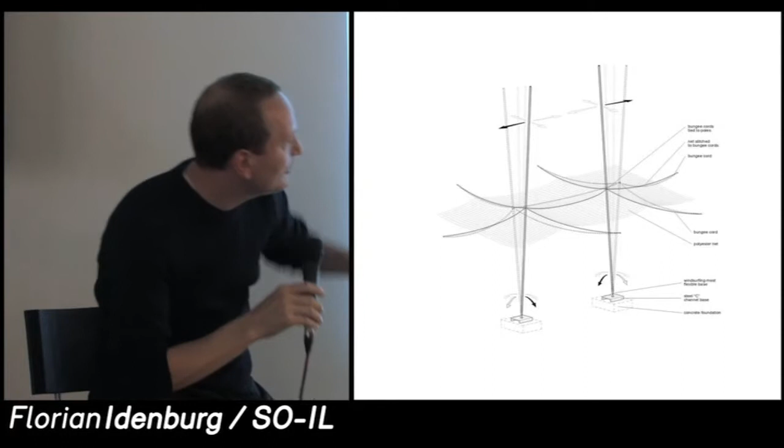I'll speak about that aspect later. So this is basically the basic building block for this system.

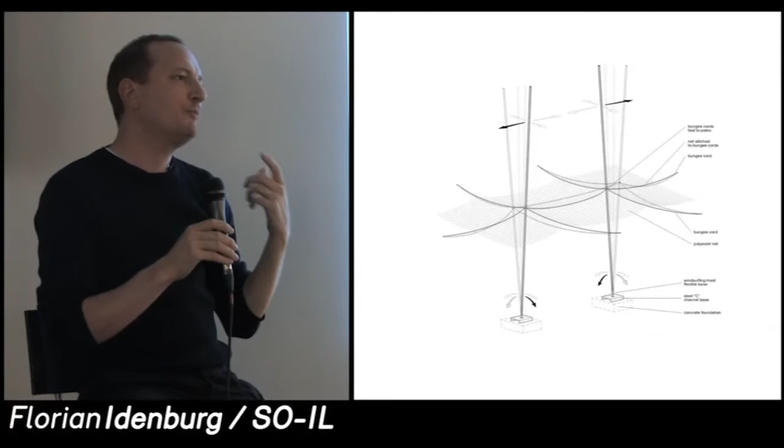With this, we filled the entire courtyard on a Cartesian grid, and we inserted a number of activators - places that are the interface between us, the user, and the system. Hammocks, a pool for cooling. There were pulleys and ropes, basically a place where people could interact with this system.

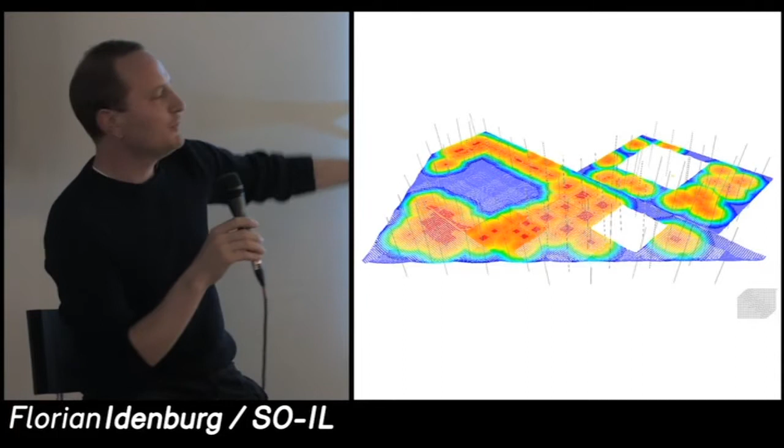This was what we presented, and we also presented this scheme to the MoMA jury, because obviously something that is always on the verge of collapse will raise, especially in the US, a lot of questions about liability. So we made this image from a Rhino model, which had nothing to do with any structural engineering, and we put the Buro Happold logo on it.

And then we won. We ended up winning because they thought about it. So the next day we actually had to call Buro Happold and said, congratulations, we won. And they asked, what did we win? We said, well, PS1, we have to build it. We explained the system, and they said there's absolutely no way you can calculate this, no way we can predict the outcome - which was the essence of the idea, but it also created a lot of challenges.

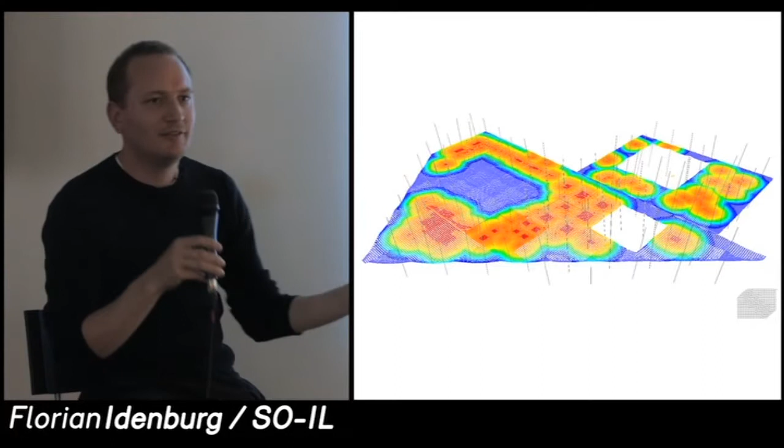So the first thing they said was to immediately build a mock-up and see if it works. We ordered standard surf masts and standard bases, and it all looked pretty promising and nice, so we said, well, this works. Then 2 days later we got a phone call from MoMA, and they said, 'That's great. Can you clean out the mess in the backyard?'

Obviously, failure would also be part of the project itself, but this was a little bit too much of a collapse early on. Luckily, we were able to continue to fine-tune the system and create this environment. I think for us it was really important that it was never seen as an object.

It was always an interior. We basically covered the entire courtyard. It was very much an interior experience.

The other aspect that I didn't speak about in the beginning, which was really important to us and something we're very interested in, is the role of the virtual within the way we currently navigate space. It seems that one of the issues with sustainability is that we care less about our physical realm because we're spending so much time in our virtual realm, and we thought, can we learn from what is so attractive about the virtual?

A number of issues that informed the scheme are its playfulness, the fact that you as a user can activate its environment, the social aspects, and we tried to see if we can get those things back into the physical.

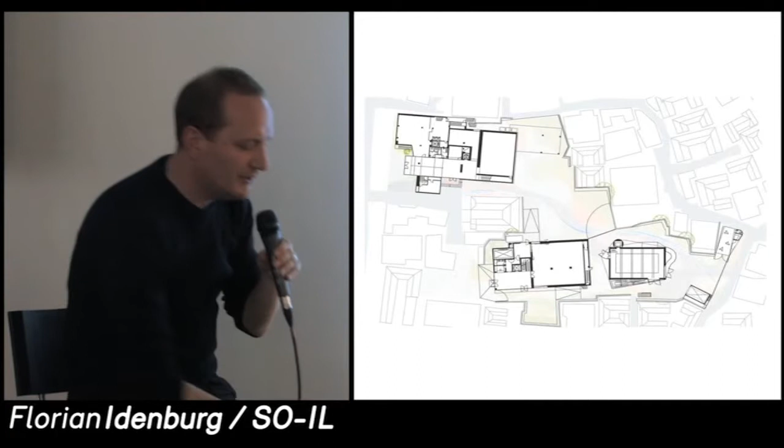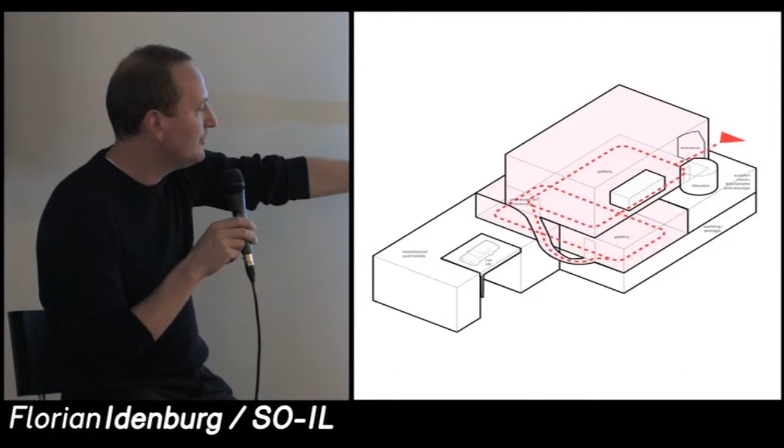A very straightforward diagram, almost a Dutch diagram, I'd say. Hard box, single box, maximum amount of allowable space within this site. Circulation pushed out, so entrance, elevator down, and stairs to the roof. Underground, much more space, another gallery space now turning into a lecture hall, plus parking and storage. The ground floor is a typical hard, white, modernist box with skylight from above.

But we felt we needed to do something with this outer edge. We needed to find a way for this hard box to blend in much better within its more fluid and historical, fine-grained environment. So we took cues from the traditional Korean aesthetic.

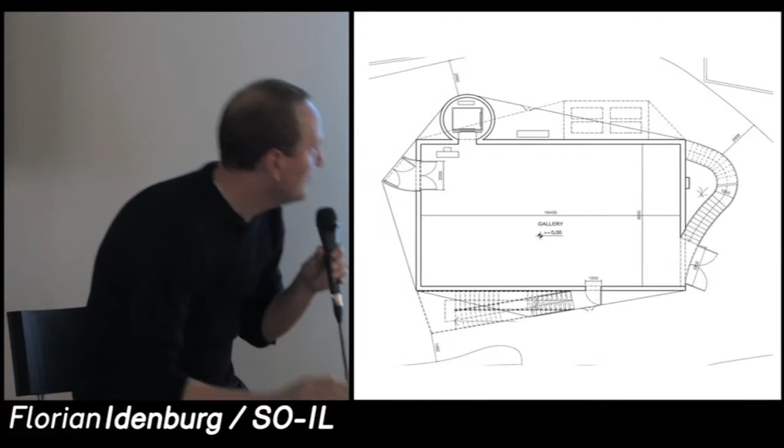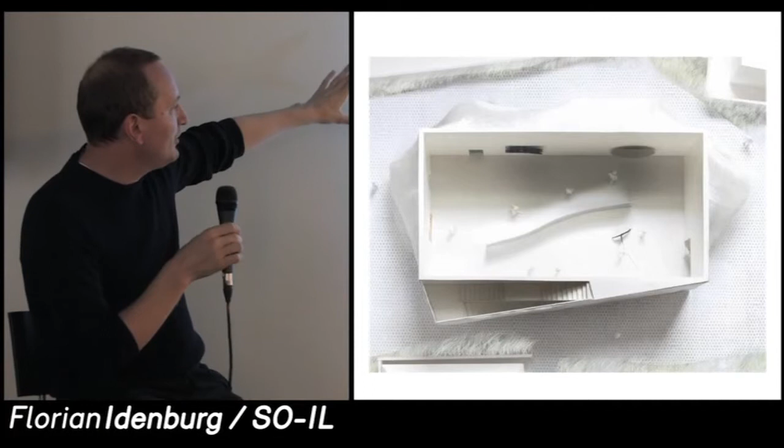So we made this model and wrapped it in a reflective stocking, basically an elastic stocking, to soften the edge. This clear box would become much more undefined, less explicit, and more fuzzy. We then had to get a permit, and the local government was very sensitive to this issue. The diagram at the bottom shows how contextual we are with our move.

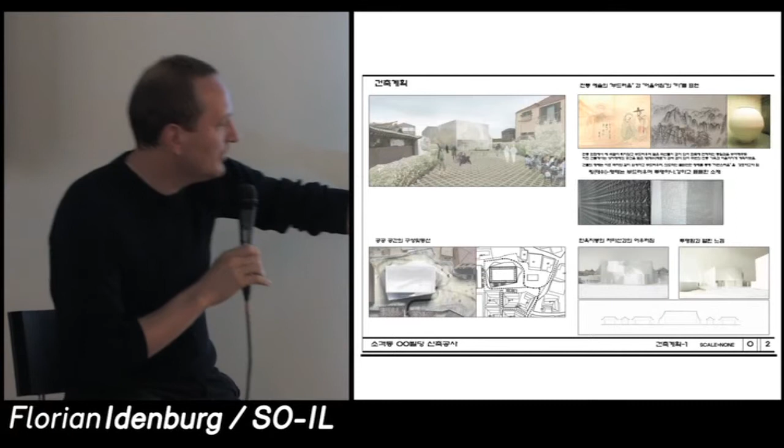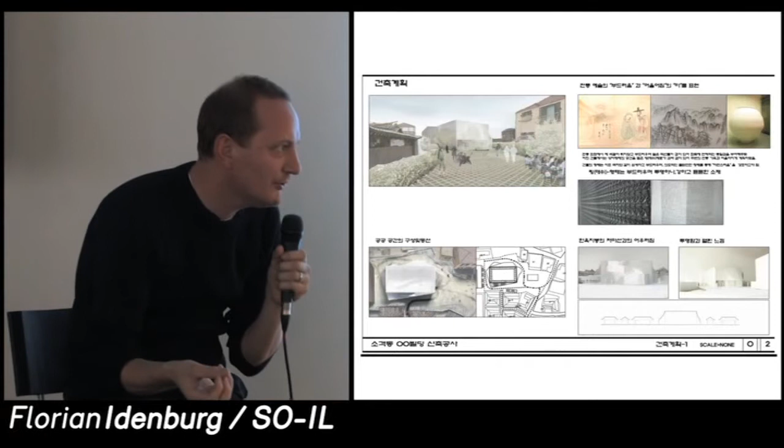The project design got approved, and they said, now go ahead, make it. But how do you do that? How do you wrap a box in a permanent fog? It needed to be strong because it was exterior, and it needed to be metal in some way—but what material could take on this form?

So we started to look at chainmail mesh, which is actually the only metal material that can take on double curvature in a very beautiful way. It can take the shape of the body beautifully because of the way these rings are connected to one another. It works on the scale of the body, a simple geometric working, but unlike any weaves or meshes that need pleating or seaming, this one really drapes beautifully in three dimensions. This is the largest scale commercially available, basically 1.3 centimeter diameter.

But we needed to look at something larger for the scale, because this is for the scale of the body—it's used for butcher gloves and belly dancing gear. For the scale of architecture, we needed to look at something larger.

So what we did is we just laser cut and made this in our office to test the scale of what would be appropriate. And we started to explore the workings of this mesh.

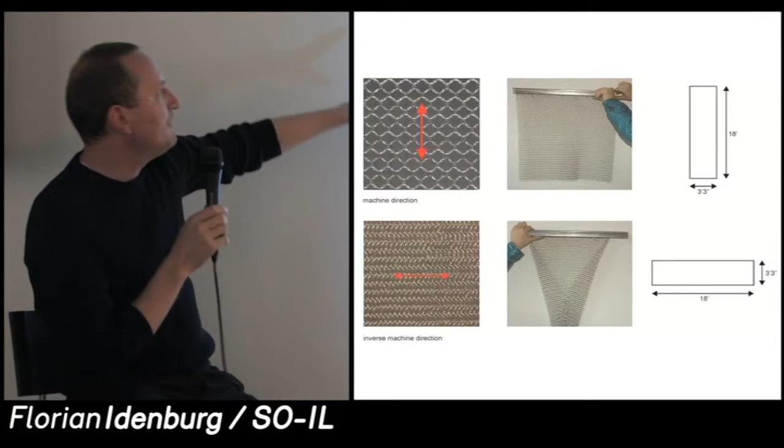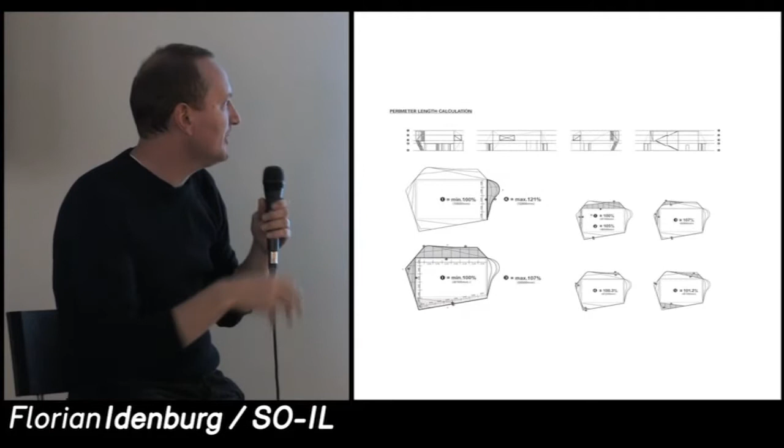And how does it structurally and geometrically work? We quickly found that there's a clear directionality. In one direction it sort of falls straight and becomes very tight, whereas if you turn it, it has this elasticity and you can start stretching it. So what we found out is what is visually the most appealing amount of stretching we could handle. Then we mapped the entire building, the height lines of the building, to see where it stretches most and where it needs to be tightest.

Then we approached an engineering firm, friends of ours, and they helped us set up a process to really start engineering this, because this is obviously something we can't do ourselves. So we decided to have a physical trajectory and a trajectory through software, because this thing has never been engineered or thought about as an architectural project. We really needed to be careful in thinking this through.

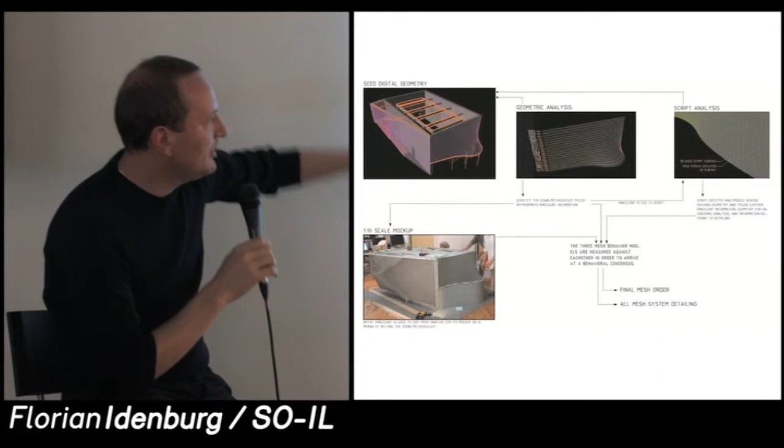So we did this parallel process. We started to do a very simple empirical testing of the structural forces and started to come up with some patterns of load lines through the mesh.

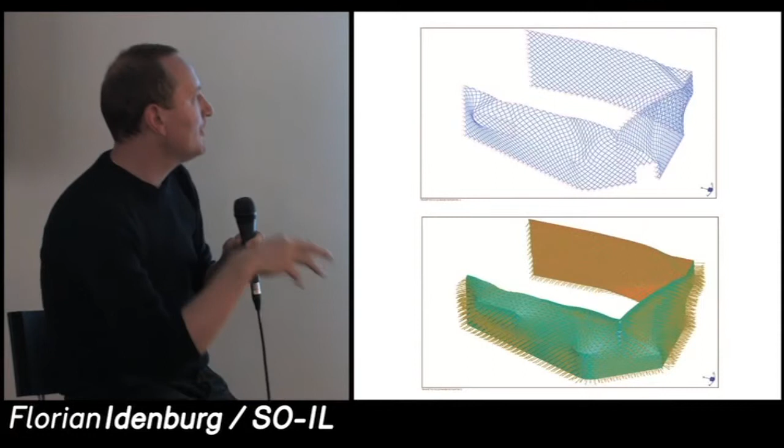We then mapped every single ring, and at some point they were so precise that they could really predict the movement of the rings to half a centimeter precision.

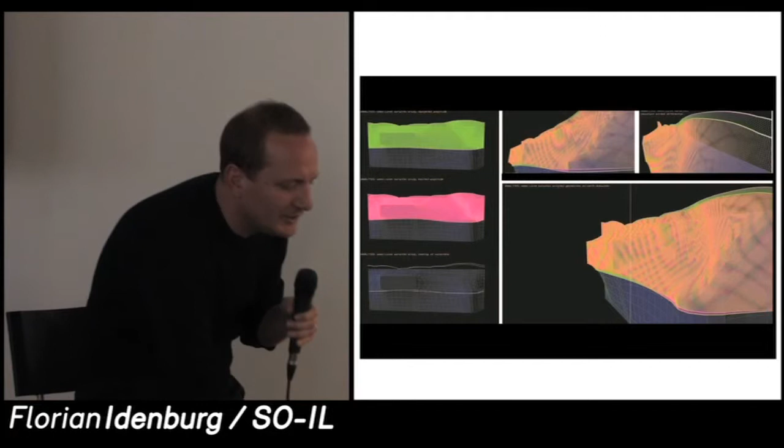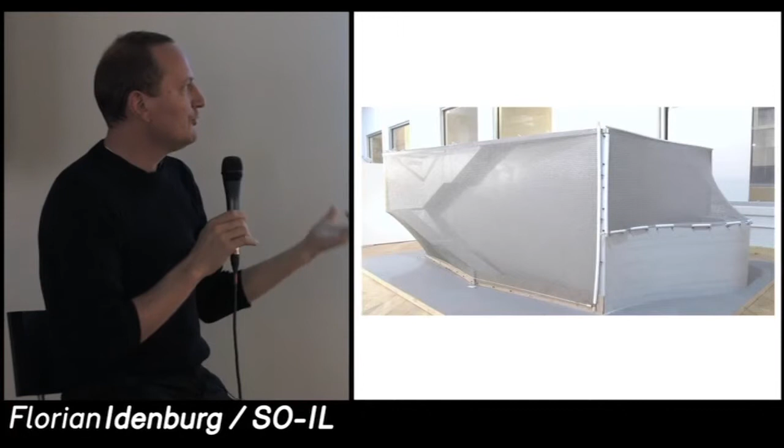This is a 1-to-10 scale mock-up we did in our office, which we're actually using to count the rings, using it for the order itself. And you see how here, for instance, this curved-out area needs no substructure or anything. Purely by stretching it, you get these geometries, such as here.

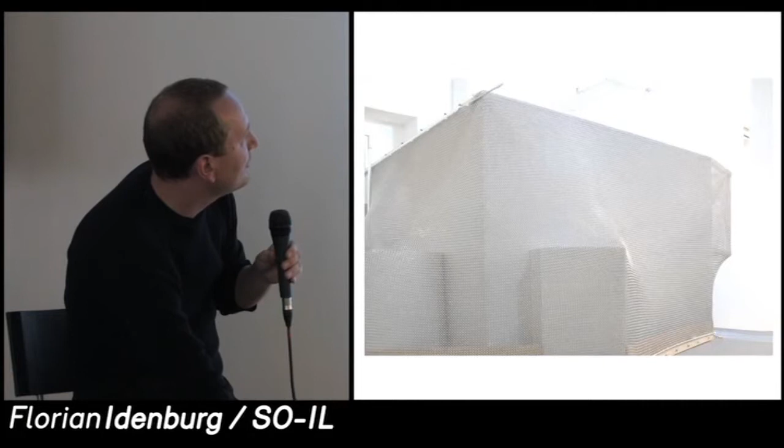This also allows us to make a completely seamless building, because they're going to be welded together on site within the same pattern, and then we'll afterwards cut out the opening. So we tie them to the frames, and then we just burn out the openings where the mesh is not needed.

We had to think about how to install this mesh because it's a very tight site, so we really had to think it through. We came up with a system of how this thing could be installed with pulleys and welded together on site. So then we thought, now we know so much about this, are we going to write specifications for somebody else to install this and get it, or isn't it much easier if we just get it ourselves?

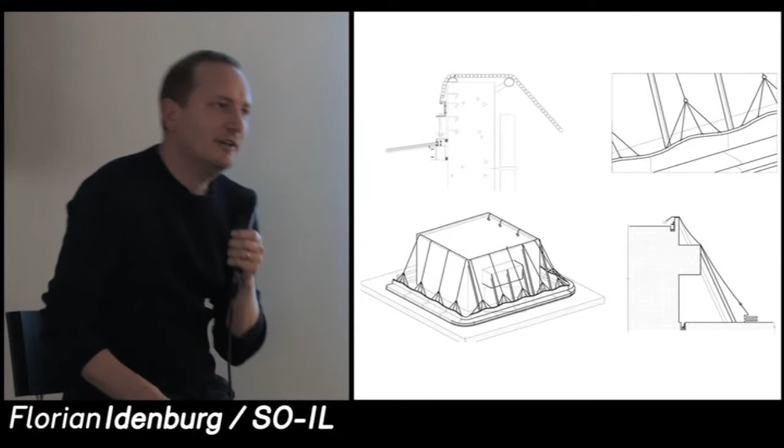And so we decided to actually get the material ourselves, and what we did is we went online.

I don't know if people know Alibaba.com, but Alibaba is a place where if you need something, you can find it. Alibaba typically has it, it comes out of China, and it's sort of a dating site for architects who need stuff. We typed in 'ring mesh'.

This came up. It was in Anping, China, and we started to chat with them because all these people have a Skype account. Funny enough, the Skype name of the lady representing them was called Ring, so we were Skyping with Ring for a long time. After a while, they sent us this mock-up, which we thought was promising, this sample.

And as it happens also with online dating, at some point you need to go visit them in real life. So we went to Anping in China.

We ended up, this is five hours west of Beijing, in this very small town where you can buy dog from the street. We ended up in this very small courtyard, I would say half the size of this courtyard, and there was our sample in the corner.

They were just done, and they were going to sleep. All the way in the back was their main production line, which is sort of the deep-frying gear. And all the way in the back was this one guy who, by himself, was welding this stuff together.

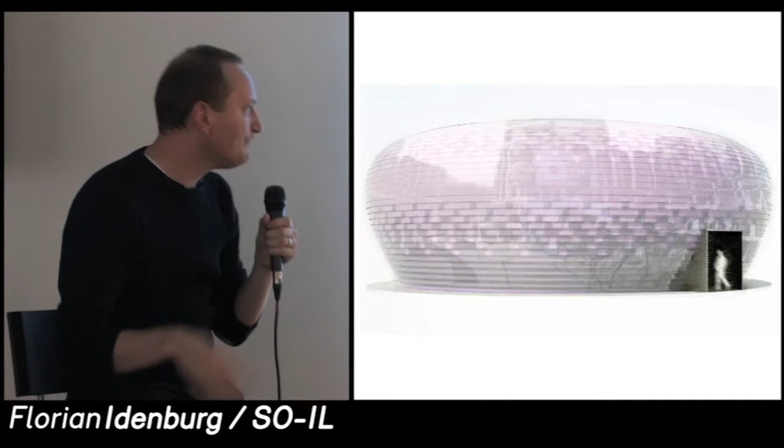And so they said, but it also rains here, and the pavilion actually needs to be used for movie screening and lectures, so we need to cover it as well. Do you have an idea? Because we're opening in 3 weeks. So we thought maybe we can keep some of this idea of this unstable pavilion by planning it with a skin that would be constantly moving by wind, a hinging connection, or a hinging set of leaves that would be activated by the wind. It needed to not be climatized, it could be very light.

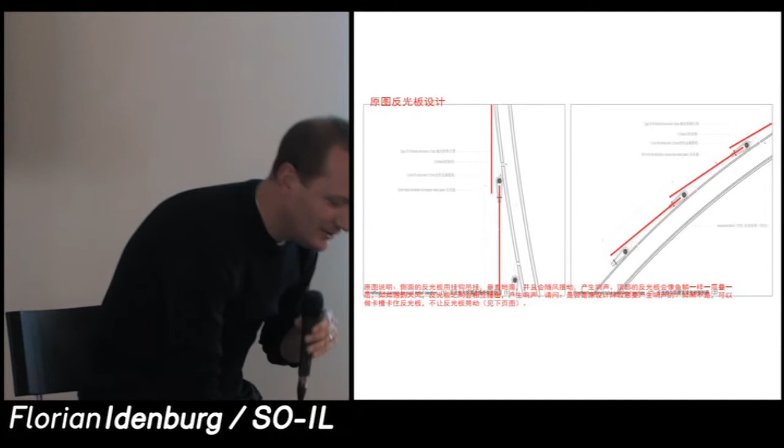They said, great idea. They said, we have 12 colors you can choose from. We suggest you choose these 3 because they look sort of metally. And then we thought, well, how often do you have a chance to make a pink building? So we said, no, do these 3. And we would like to see a mock-up, because we had sent the detail of how this thing would be hinging and connecting, but they sent it back, saying it's too expensive, it's not going to work, we're not going to do this, is water going to come in, thanks, and we're going to use tie wraps. So they used tie wraps.

And we said, sure, that might as well. Can you make a mock-up? We would like to see what it would look like. They said, why do you need a mock-up? Why don't you come to the opening? Because we actually built the thing already.

The idea was that because it's actually a pavilion that moved from Beijing to Shanghai to Guangzhou, we wanted to use its reflection as a way to incorporate the surroundings within the appearance of the building. The fact that it was faceted and low res created this fragmentation of its context, which was an integral part of the architectural appearance.

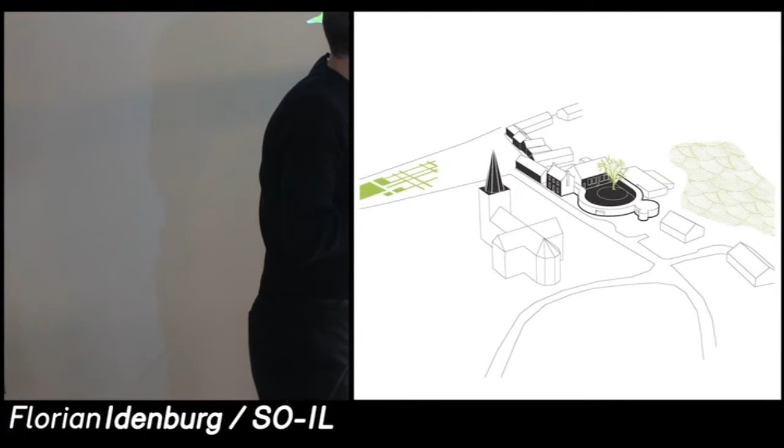Here's the old house, which I'm not showing, the church, and the school itself. And we decided to keep the school and basically gut the entire interior. What's important also as a historic typology - this is one of the only old schools in Belgium where there is the teacher's house and the classrooms behind it. That's one building - a unique typology.

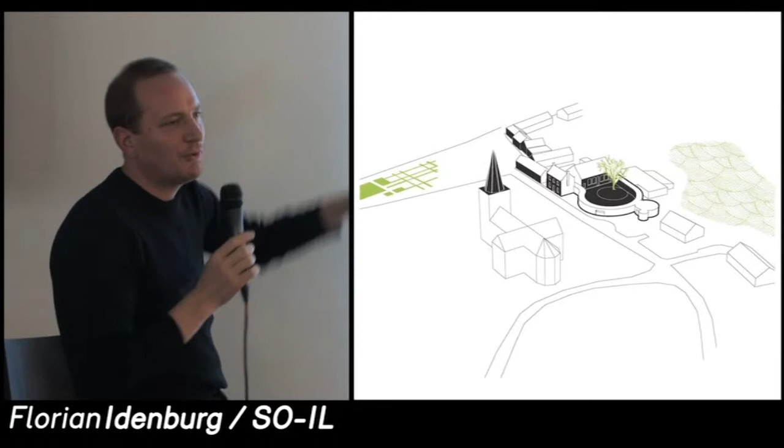So we decided to keep the school, put most of the program in there, and this was the first time we could make a building that was both in the center of town and at the periphery of the town. And so we decided to have the additional spaces free up from the center of town and project themselves towards the landscape.

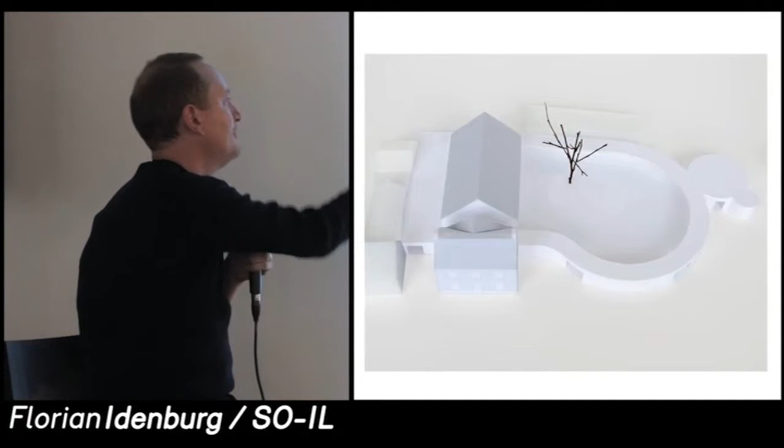So we made a very precise insertion. We tried to define the space of this beautiful old tree that was around it, and then have the additional program, which I will get to on the other side. So the street line continues, and you open through the courtyard into the space.

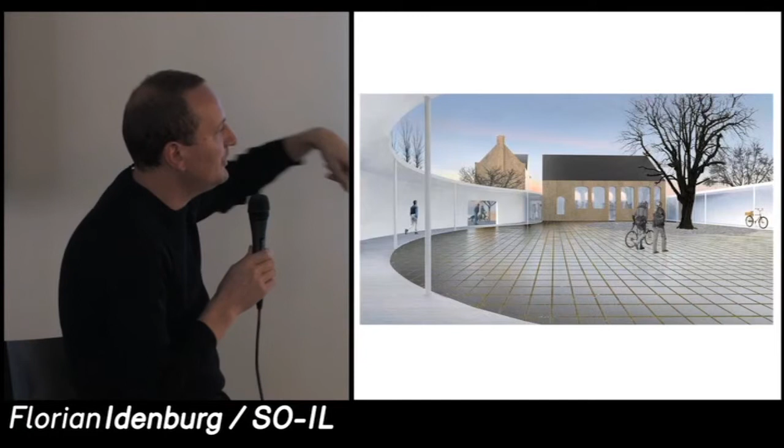So here you come through this wall, which is an exterior wall, and right there where we make this insertion is where you enter the building. The program is very straightforward: it's a multi-purpose room, offices, a toilet, and storage.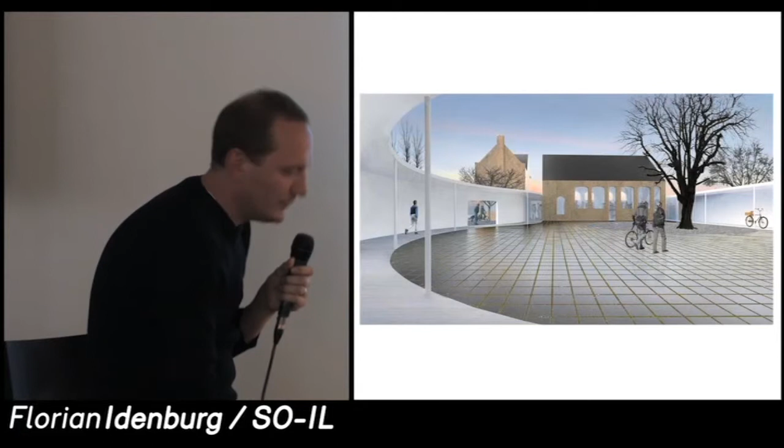So you come in here, enter through the vestibule, the meeting rooms in the old teacher's house, the bar, which also functions as the entrance control, the multi-purpose room, restrooms, storage, and a space to circulate the old school. And this is all exterior but covered, a sort of walkway.

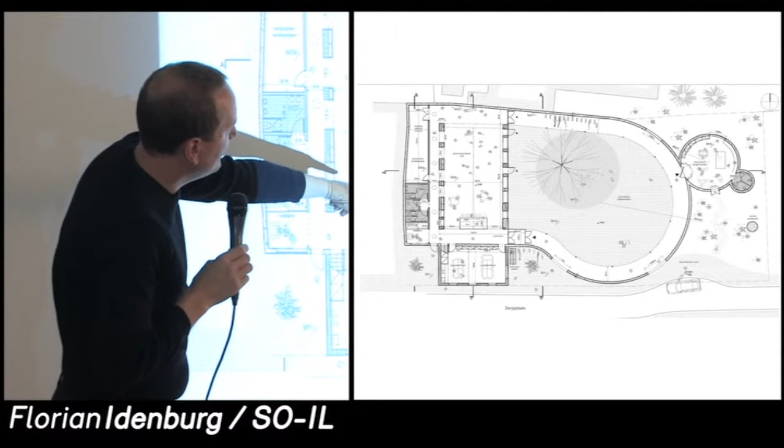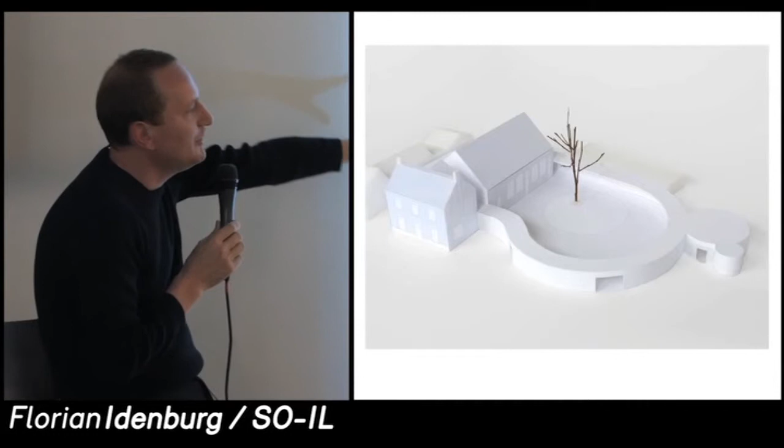And the youth, because they need to be part of the community but also want to be free. So this shows the old people dancing and debating, and then the youth space, for the 10 to 20-year-olds. We wanted them to be part of the community but also have a sense of freedom and independence, so they're sort of coming out of this wall, and the area around it is left wild for them to explore.

But most important, obviously, is actually the old schoolyard that we're trying to reframe, with also the relation to the church, as a space for the community to happen.

So we're very excited because this is our second building that we are hopefully building now. So let's see if I can sign that contract on Tuesday.

The last project I will show is actually our first project, and maybe brings us a little bit back to where we started. This is a house upstate New York. New York, Manhattan, has two rivers, the Hudson River and the East River. The Hudson River has a beautiful Hudson Valley, where also, for instance, the Dia Beacon is, and it's basically a beautiful area to enjoy nature, and some people who can afford it live there.

And here we were asked to design a house for a true modernist, his weekend house up in the hills, overlooking the Hudson Valley. Very rocky site on a ridge with beautiful nature.

This is our client, Ivan Chermayeff. Ivan Chermayeff is the son of Serge Chermayeff, a quite well-known modernist architect, and he is a graphic designer. At the end of his life, he had saved enough money and asked us to make this weekend house for him. You might know him from some of the logos in the 70s—he's the one who turned the more Americana-style logos into more of an international modernist style. He also did things like Chase Bank, and he's very much the designer who was instrumental in shaping the identity of corporate America in a way.

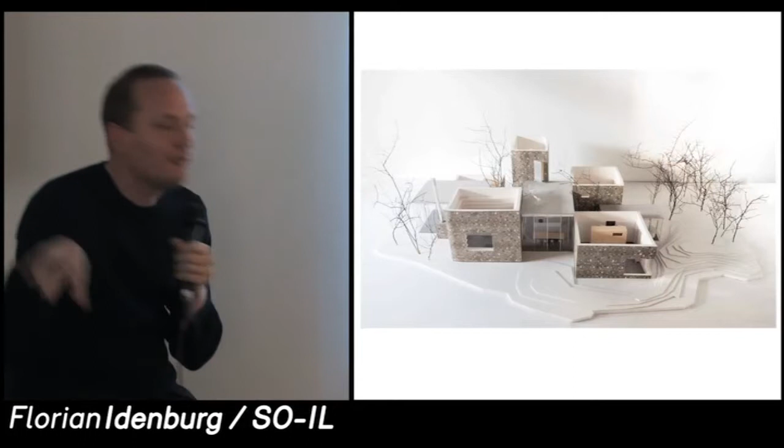The house, as a real modernist house, has every function in its own box, and consists of a series of completely solid and completely open boxes, so there's always an openness towards the context. Ivan himself would collage stones that he had found on the site into the facades. They're very heroic—here you see the closed boxes and the glass boxes.

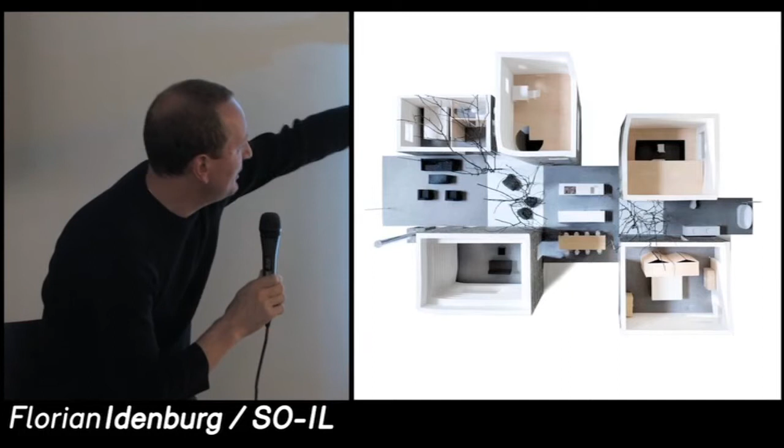You enter here underneath. This is sort of the big central living kitchen. Here the library, living room, guest room, maybe a help room. His studio there where he could still work.

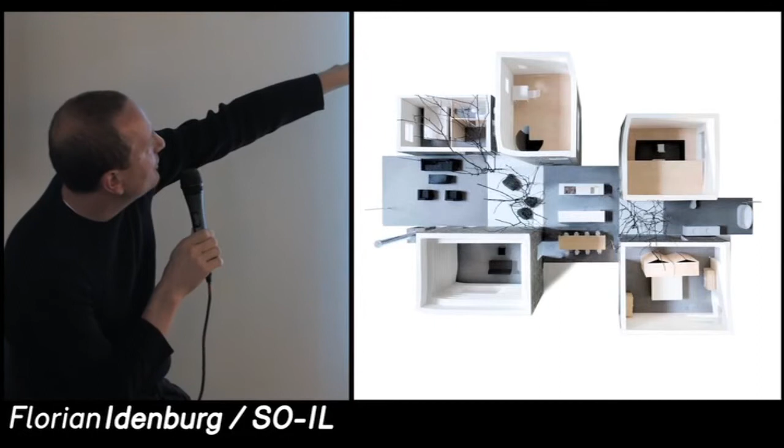Bathroom and master bedroom. His second wife, because this was built together with his second wife, could still walk stairs, so for her we made a little tower so she could escape him and have her own quiet space. And here you see this different framing of the environment in these different spaces.

And ultimately, the most fantastic bath, even for somebody who's 80, to be in nature without having to be seen.